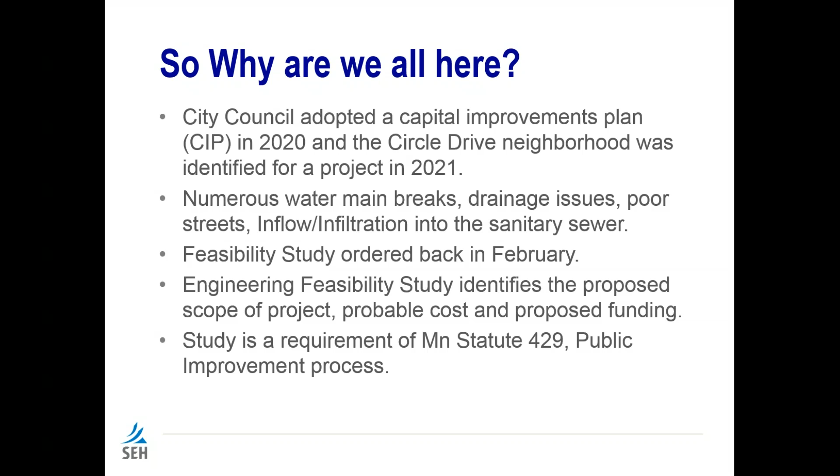So back in February of this year, the City Council ordered the preparation of a feasibility study. An engineering feasibility study identifies the proposed scope of the project, the probable cost, and the proposed funding for the project. This feasibility study is actually required by law under state statute 429, which is what we refer to as the public improvement process. Real quick, what is that?

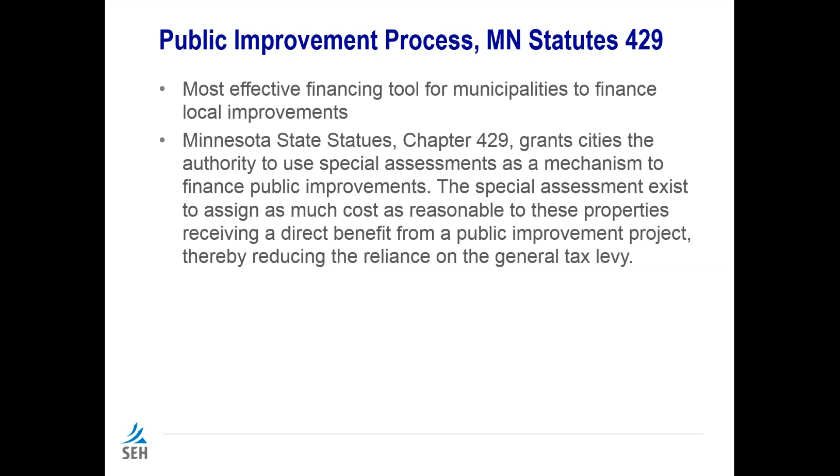Minnesota Statutes 429, as I note here in the slide, is really the most effective funding tool for municipalities and local government. It gives local government the authority to use special assessments as a funding tool to help finance a portion of public improvement projects. Special assessments are basically set up to assign as much cost as reasonable to those properties that receive benefit from the projects, helping to reduce the burden on the overall community.

So what is the scope of this project? Most of you are from what we refer to as the Circle Drive neighborhood - North Circle Drive, East Circle Drive, West Circle Drive, Inner Drive, and Hillcrest. In addition, we are looking at Hickory from West Circle up to at least 5th Street, if not all the way down to Deer Trail, as well as Rogers Drive up to the golf course.

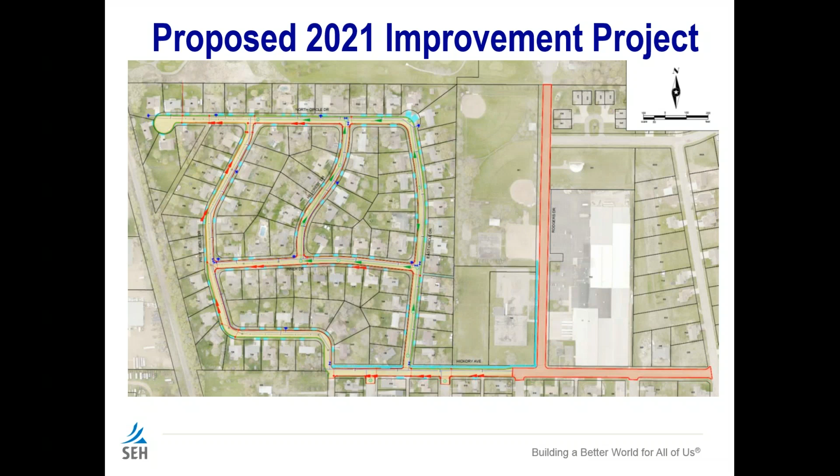Now you'll see the different colors there. The areas in yellow, with a lot more drawing, are the sections of road proposed for full reconstruction - that means everything: utilities, streets, etc. The areas shown in pink on Hickory and Rogers are being looked at as only a mill and overlay, since those sections of street are in much better condition than the rest of the areas in yellow, and the utilities don't have the same issues in those sections either.

So what's proposed in the improvements, just to recap, water main improvements include complete replacement of all the water main in the reconstruction areas. That includes water services between the mains out in the road and the property line up in the boulevard, so replacement of the service laterals that go to your home.

For sanitary sewer, about 2/3 of the sanitary sewer in the Circle Drive neighborhood is old clay tile, and that all has to be replaced. The newer portion of the development, the western portion, is actually PVC and will not need to be replaced. So the clay sewers will be replaced, and the services out to the property lines will be replaced.

Pretty much extensively, all the storm sewer will be replaced in the reconstruction areas. With the new reconstruction projects, we also include installation of sump pump or sump drain boxes, basically a place where the sump pump water can be sent to and drained into the storm system.

Obviously, street improvements, total reconstruction of the streets, with new curb and gutter, driveway aprons, and there is a little bit of sidewalk proposed in a few areas to connect to the North Side Park.

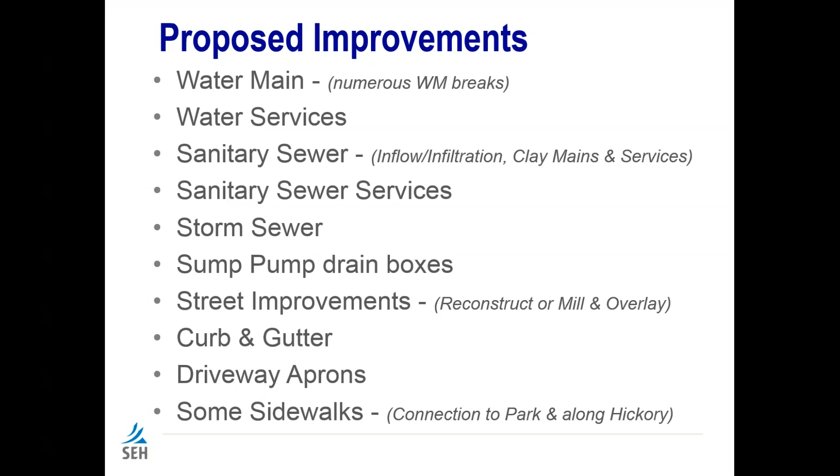I know this is probably real small on a lot of screens, but just to recap for the Circle Drive area, all the lines in red are what we're anticipating as all the new storm sewer.

For those that maybe live over on West Circle Drive and the cul-de-sac, you may realize that there's storm sewer that actually dumps off of Inner Drive and goes into the back between two homes, and then it drains along the railroad. It's not something that's easily sustainable, and it's created problems over the years. It all ultimately ends in the same place. The reason they probably did it way back when was it was the shortcut.

We're proposing to replace that, redirect that storm sewer, and bring it down to North Circle Drive and into new storm sewer, sending it in the same direction.

With that said, our study included a stormwater study and a model of the whole drainage system and how it works with the golf course, the golf course facility, and the wetlands and basins in the golf course. We'll be in communication with the golf course regarding potential pond expansions and things like that. So all of this is intertwined, and the whole system will function better if we look at it all as one piece. So again, in replacement of the storm sewer, it'll likely include some pond construction or pond expansion up in the golf course.

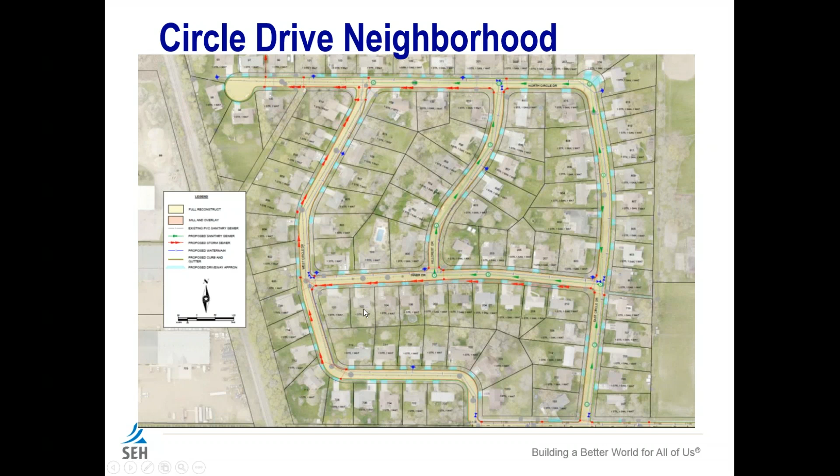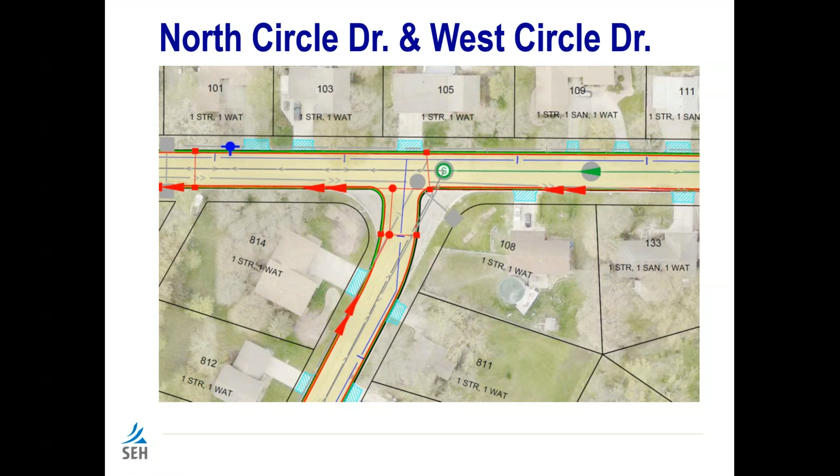A couple of things I want to highlight too in the Circle Drive neighborhood. This intersection of West Circle Drive and North Circle Drive is a big, massive sea of blacktop. We never would build something like that today. It'll be reduced down to a normal geometric intersection that'll eliminate a lot of blacktop. Probably you get a lot of fast cars turning because they can. So that will be modified, and those areas will be put back to turf.

The corner of North Circle Drive and East Circle Drive has kind of a bulge bump out, kind of a half cul-de-sac. We would propose to revise that as well, because it becomes a snow plowing challenge and adds more maintenance to city staff.

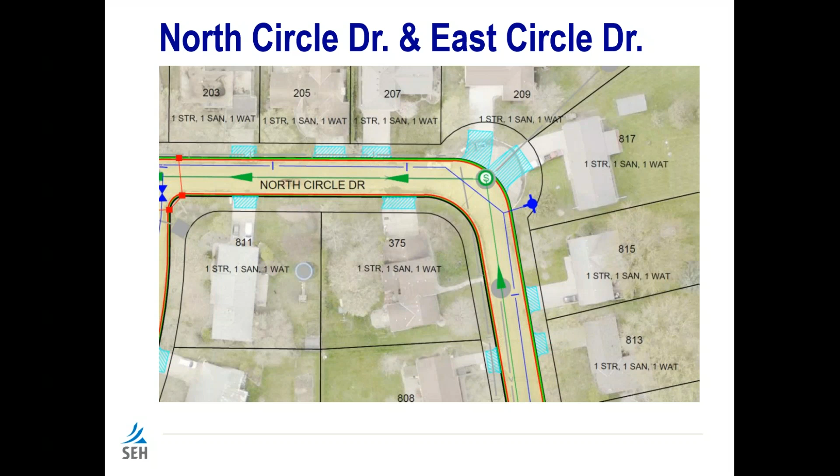Last item, and I don't have really a detail of what's proposed. I see my screen is... there we go. I'm trying to see what you're seeing on the screen, and I think what you're seeing is a slide off. Oh, that's great. If any of this sounded a little odd, it's why it sounded like I was ahead of myself. It seems like what you're seeing is a screen difference from what I am. Okay, let me see what's happening here. My apologies.

We don't have the exact detail on how it's going to look, and this probably doesn't affect most folks here, but there's a lot of unnecessary traffic going down the gravel road of First Street. So we're probably going to do something to make that more like a narrow drive entrance, less of a convenience for traffic to go up and down that gravel road. It's not meant to handle traffic due to its width. It's an alley, not meant to serve a lot of folks. So that'll be part of the design as well.

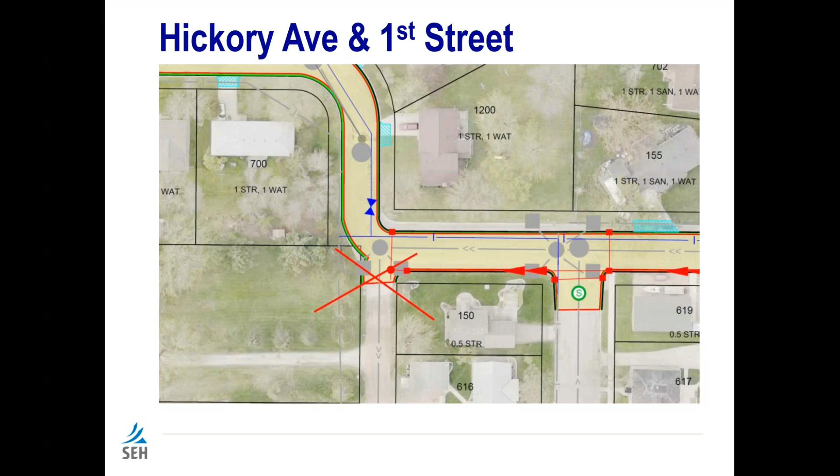Okay, next slide is Hickory Avenue. As you can see, the west half of Hickory Avenue is the proposed reconstruction. The east part and Rogers is what we're showing as a mill and overlay. The reconstruction here on Hickory Avenue will be the same as what's proposed in the Circle Drive area. Not to get into a lot of details, but again, it's a full reconstruction, full subcut, full preparation of a road bed, way better than what's there today.

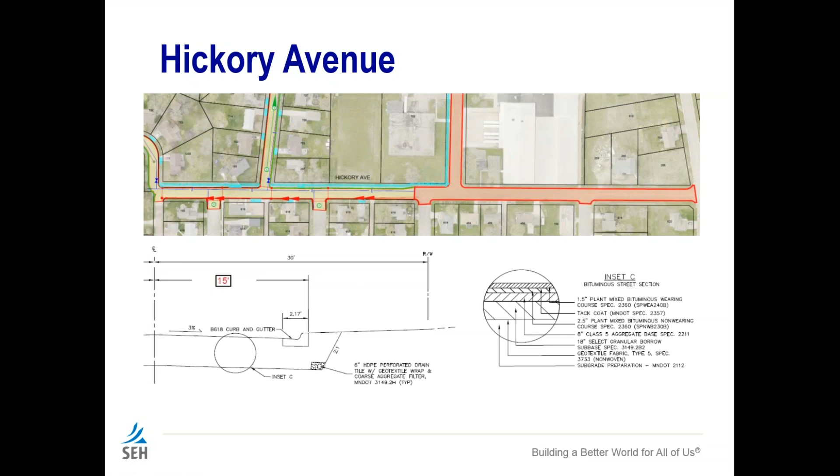If you can read this, basically we excavate down and place geotextile fabric. There's 18 inches of sand that works with a sub-drain to help get rid of sub moisture. It's also where the sump pump lines can go. On top of the 18 inches of sand is 8 inches of aggregate base and 4 inches of new bituminous. So again, a superior section, one that is more sustainable, can last longer, and is easier to maintain long into the future.

Rogers Drive, which will pop up here in a sec, is again mill and overlay. I'm showing here the section on that. What that usually includes is an edge mill near the curb line, which provides a little space for the new blacktop to be placed, and then basically a 2-inch layer of new blacktop is laid over the top. Again, mill and overlay, pretty basic - helps strengthen the road, preserve what's there, and extend the life of that road.

Chris, I've got a question for you here. Sure. I believe Ed or Gene asked, when you say east half and west half of Hickory, where is the midpoint - where does east start and west begin? The intersection with 2nd Street... so just west of 2nd Street. I'm sorry, I got my streets mixed up. So just west of 4th Street would begin the full reconstruction from there to the west.

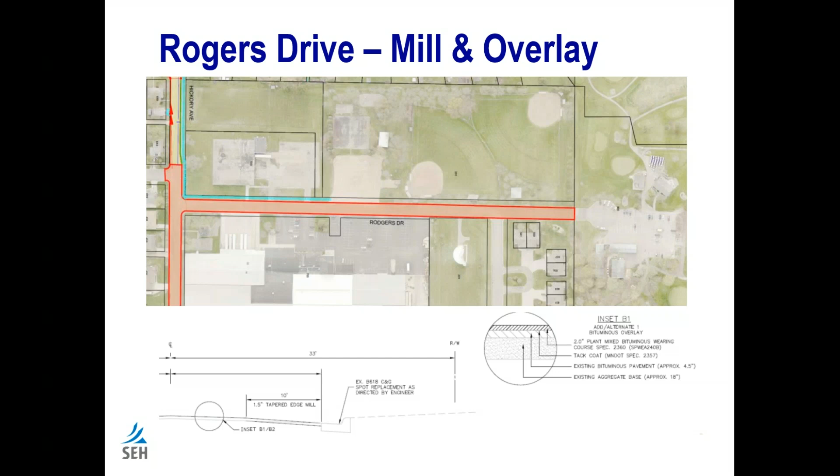Next, as soon as the slide pops up, is the total estimated cost of this project, and this is still preliminary. We're in the process of still evaluating some of our cost estimates, and there are some things here that are probably still not included in the cost. An example being, if we do some ponding, that cost is not in here. And as I'll show you later, the only thing it'll affect is funding from the stormwater fund, not directly if assessments are made. So as you can see in the numbers here, I'll read them off roughly if you can't read them on your screen.

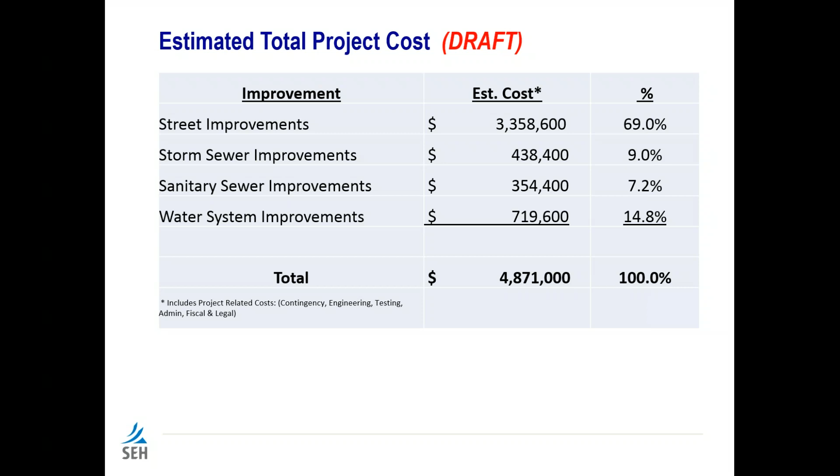Street improvements are estimated a little over 3.3 million, or 69%. Storm sewer improvements are estimated at about 438,000, or 9% of the cost of the project. Sanitary sewer improvements are about 354,000, or about 7% of the project. And water system improvements are about 719,000, or about 14.8% of the project. Total estimated cost of the project is about 4.8, almost 4.9 million. And again, there may be some items not included here as we finalize what we're looking at for stormwater ponding and things like that.

So how are local projects funded? Projects like this - general levy, which is citywide property taxes, that's one way. Fees from the sewer utility, the water utility, the stormwater utility - those enterprise funds, the money they collect from monthly charges, has helped fund those improvements. In fact, a good share of that's coming from those funds. Assessments to the benefiting properties.

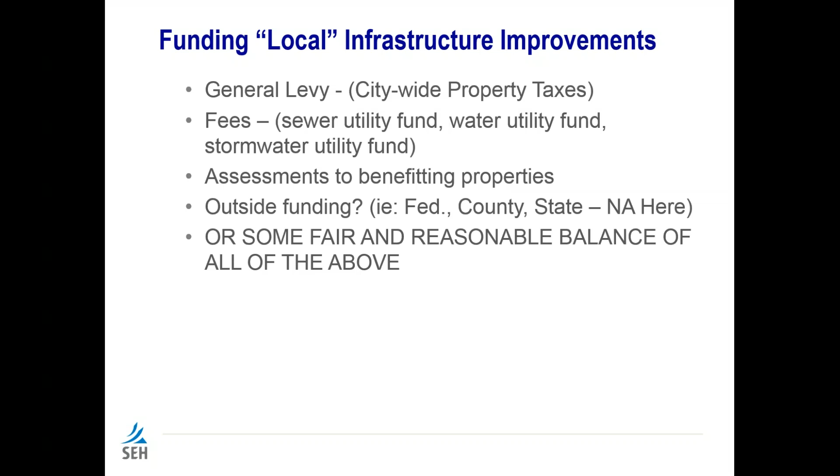In some cases there's outside funding available, but for a project like this, given its location, there really aren't options for outside funding from county, state, or federal sources. So what we aim for is some fair and reasonable balance of all funding sources.

The proposed funding as laid out in the feasibility study: sanitary sewer utility fund, about $297,000, or 6% of project cost. Water utility fund, about $592,000, or about 12%. Stormwater utility fund, $438,000, or about 9%. Assessments for street, water service, and sanitary sewer service, almost $980,000, or about 20%. The balance, from general debt service through the general fund, is just under $2.6 million, or almost 53% of the cost of the project.

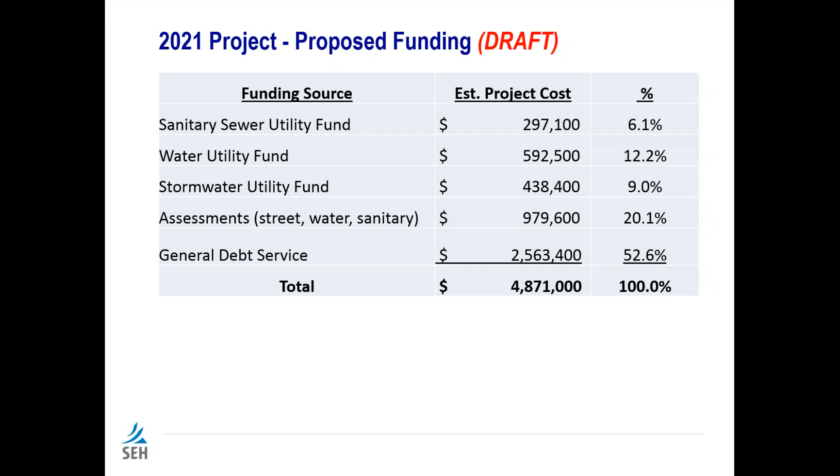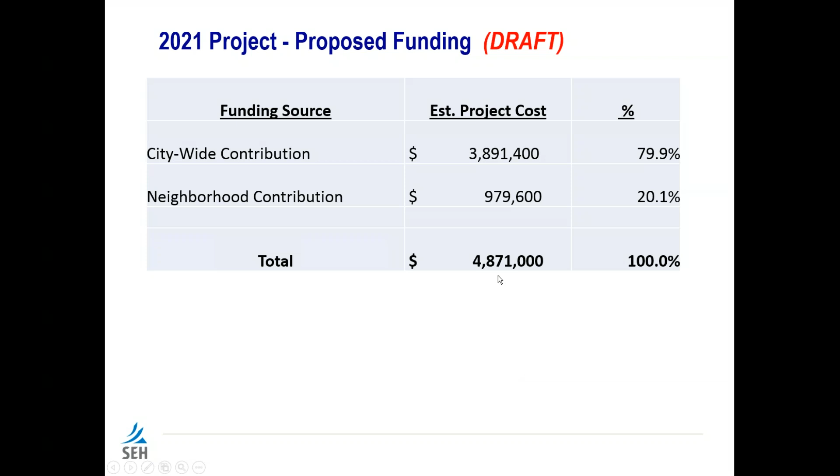That balance would be through the general debt service. I always like to do a comparison slide: citywide contribution includes all those funding sources plus general debt service, about $3.9 million, or almost 80% of the cost of the project. The neighborhood contribution, which is the assessments, is about $980,000, or about 20% of the cost, bringing us to just under $4.9 million total.

Let's talk a little about assessment policy and methodology. The City Council and Public Works Advisory Board developed an assessment policy back in 2013-2014, prior to the Fifth Street project. The assessment policy was adopted by ordinance, written so that assessments on future projects would be consistent, uniform, fair, and equitable from project to project.

The baseline is that all single-family residential properties are treated the same, because everybody is part of a street system. The residential unit is basically our baseline for how all assessments are determined. I'll get into that in a bit so you understand what that means.

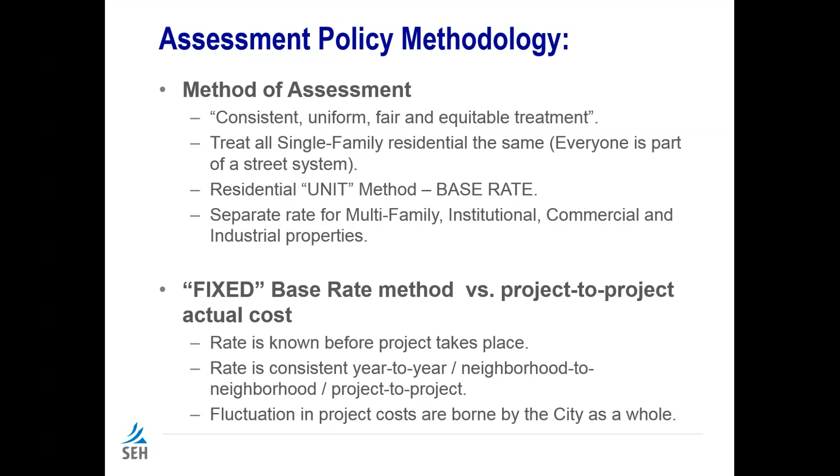For corner properties, if there's an improvement on one side, they get a half unit on that side, and a half unit on the other side if improved there too. There may be cases where only one street is done this year and the other in a future year, so that corner property may pay a half unit on this project and a half unit on another. Ultimately, once both corners are done, it totals one unit. That's how residentials are determined.

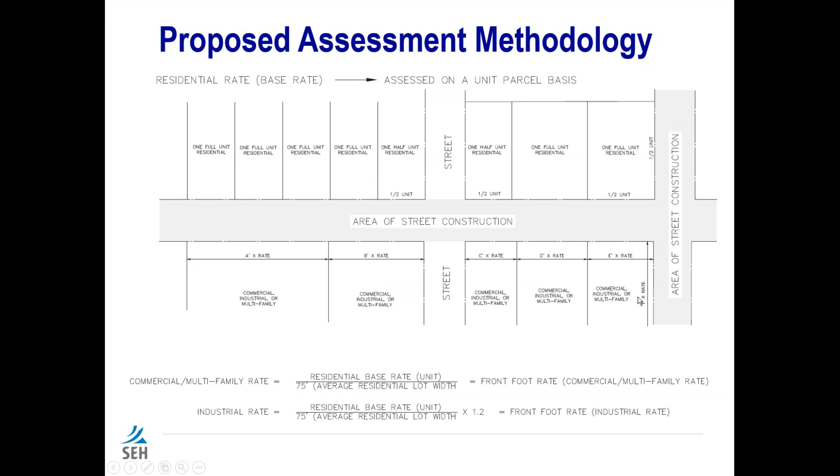Commercial properties are assessed similarly, but since they may be larger, their total front footage is measured and a front footage rate equivalent to the residential rate is applied. To determine that rate, we take the residential rate and divide by 75, an average residential property width, to get a front footage rate. This is applied across commercial, industrial, and multifamily parcels, assessed accordingly since they're typically larger.

When I talked about fixed rate, unit rates, this is how the rates are. For the full reconstruction street assessment proposed for 2021, it's $7,027.80 per unit. So your single family residential property for a street full reconstruction would pay $7,027.80. Those on the corner would pay half if only one side was being done.

For the mill and overlay, and we don't have too many residentials, but that assessment would be $1,621.80 per residential unit, single-family residential unit. And again, those are the baseline for the multifamily and industrial, etc. that are calculated.

The multifamily commercial properties are assessed at $25.95 per front foot. And then we have a townhome property up by the golf course, and those end up getting divided up by each unit, and in the end they only pay $497 for their mill and overlay portion of the project.

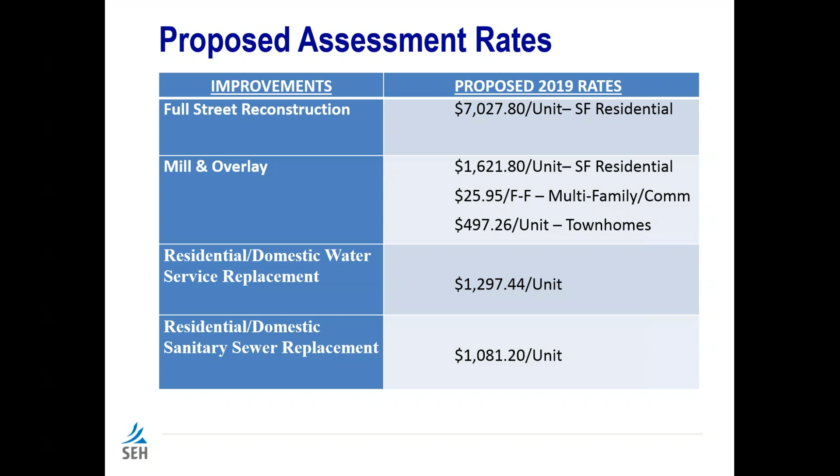For those, there's some properties that will not have sewer service assessments because the sewer mains and services are PVC, so it'll only be water service and street. That amount would be $8,325 per unit.

Talk a little bit of... it's jumped screens on me. Oh, there we go again. My apologies, there's a delay here. So it'll pop up here in a sec. So to talk a little bit about the assessment process, where is that darn slide? So anyway, the assessment process. We're seeing the assessment process now, Chris. Pardon? Okay, we're seeing that slide now. Okay, yeah, I must have a delay on there.

There we go. Okay, so basically, the way the assessment process works, if you've never been through it, again, I should point out that the assessments and assessment hearing will not take place for about another year. It'll actually be probably about February of next year, so consideration by the City Council in February of 2021.

The way the assessment policy is written, a property that's assessed has until October 31st of 2021 to pay the assessment if they would like to pay it up front, or they can be levied to the county and payable over with the property taxes over a 15-year period, where the first payment would be due in 2022.

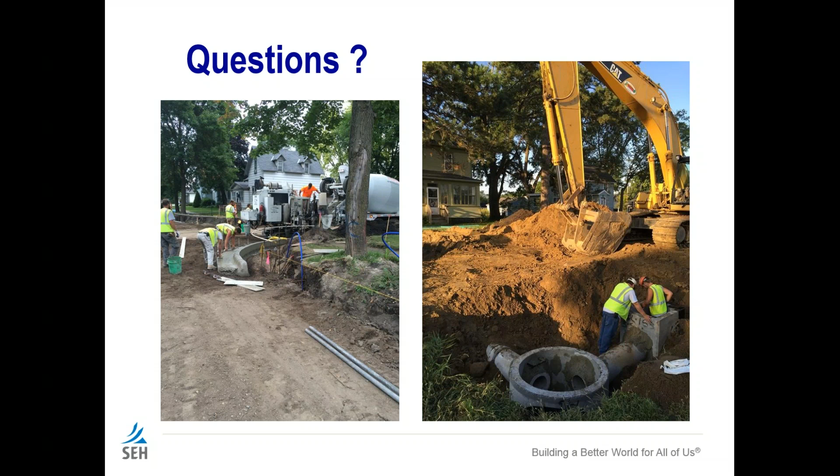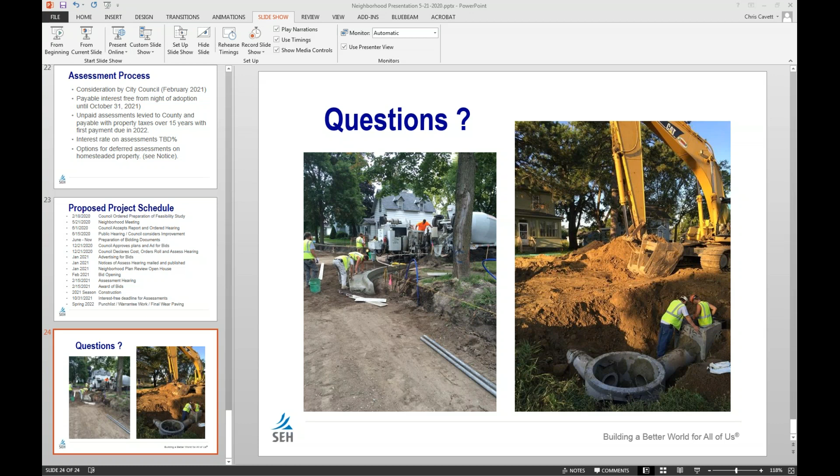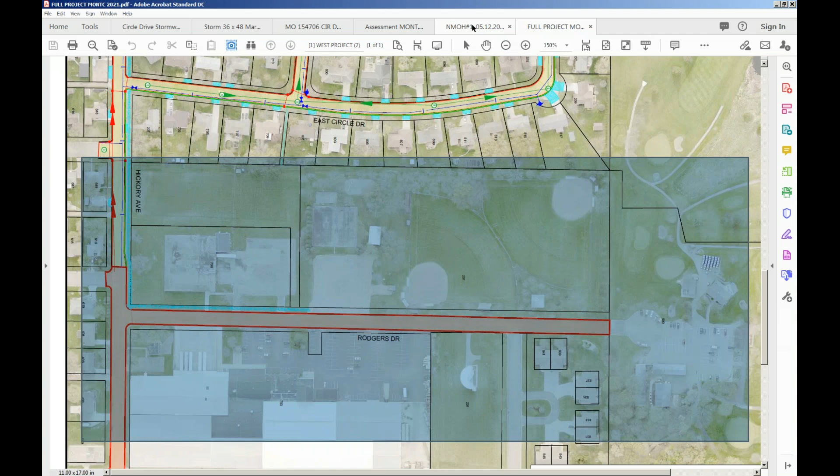One question I know came up, and I'm going to go to a different slide, was about access. I'm sure there's questions about how we're going to get in and out of the neighborhood. Sorry, I've got all these darn slides up here. Obviously those are a lot of fine details we haven't necessarily gotten into specifics on—those are things that get written into the contract—but just generally speaking...

Take the Circle Drive neighborhood—construction will definitely occur down in the cul-de-sac. Construction always has to occur at the downstream end of the sanitary sewer and the downstream end of the storm sewer, so it'll start down at that end. The contractor still needs to have access and maintain reasonable access to the neighborhood.

I would imagine they would probably do the cul-de-sac and then start up West Circle Drive. When that happens, people who live in that area would be able to access maybe from Inner Drive, from Hillcrest, from North Circle up to a point. Depending on what type of work is going on, folks may need to walk a short distance to their home during certain times of construction. Certainly during the active time when the trenches are open, nobody's going to get to their house.

If there are people with special needs, we'll obviously be asking those questions, and arrangements will be made. As different parts of the project become buttoned up, they will become the access points for other areas that start to go under construction. So generally speaking, the contractor still has to be able to get in and out with their equipment as well.

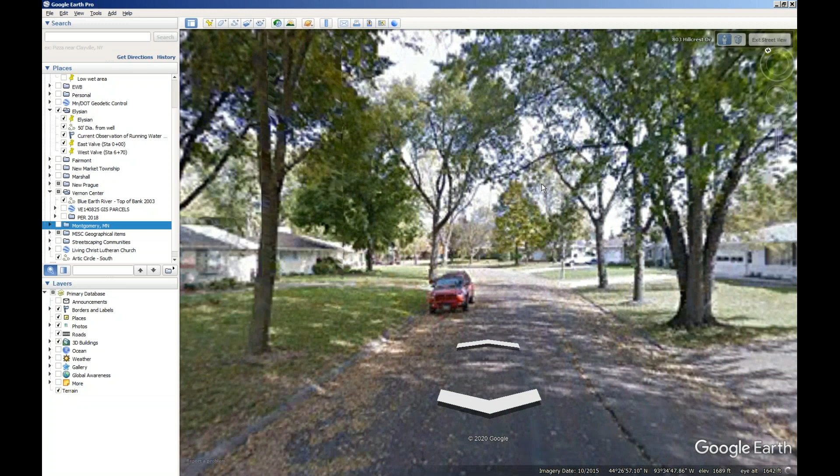The answer is yes, and we haven't gone through and evaluated specifically—I'm not picking on Inner Drive here, but I just brought up the street view. If we have a lot of trees real close to the curb, there's probably a good chance they're going to be taken out, number one because of exactly that reason, the root damage. Also keep in mind, we're building this road for the next half a century plus.

And those roots are going to wreak havoc on a new street, so we will go through and evaluate it. I know this is an older neighborhood with a lot of older trees, and especially if they're ash trees close to the curb, we'd probably be looking at taking those. I know Public Works would prefer not to have any trees at all in the public right of way, so basically about 15 feet behind the curb is what we'd be looking at and evaluating whether it should be removed. I'm not a big fan of taking out trees, so we don't just blatantly go through and plow everything down—we take a professional look at it and determine what makes sense for the long term of the street, utilities, and other things in the neighborhood.

The next question to Chris, unless there's a follow-up: will Hickory be done following the work in the Circle Drive area? I'm assuming as far as phasing.

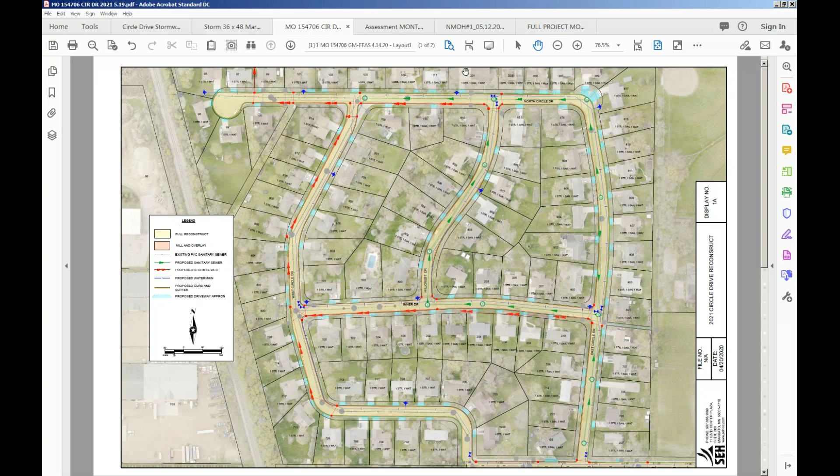Yeah, that'll be something we'll evaluate as well. Obviously, Hickory is going to be key to access to the neighborhood, so the contractor would have to be strategic on how they deal with it. I could see them maybe, if they're working on West Circle Drive, building it out to 2nd Street, so at least they have 2nd Street as a second access. Once they need to start on the rest of it, then they've got access now, whether it comes in from the west or the east. Again, we need to be able to flip-flop and strategically use 2nd or 3rd to get into the neighborhood.

Next question is, when it comes to funding, is there any consideration of actual water usage? Example, one family's average use is 5,000 gallons a month, another family uses 2,000 gallons a month.

No. The assessment for the water main improvements is funded from the water utility fund itself. The only portion that's assessed is the service lateral from the main to the house, and that's not dependent on usage. Everybody is a user and everybody contributes to that fund, but the water service is considered actually owned by the property owner. So the bigger user, when it comes to water utility payments, that obviously fluctuates by the user themselves, but the actual pipe that goes in the ground is indiscriminate. It costs the same no matter which house or which property it goes to.

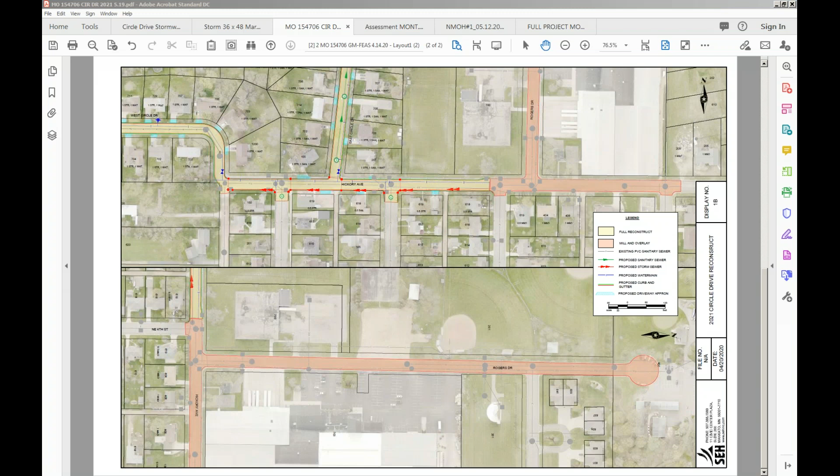Sidewalk plan. I should point out a couple things here. Let me see if I can bring up a different slide.

Okay, this is an overall picture of the neighborhood. So the sidewalk we are looking at including with the project -- I didn't mention this before, but Hickory Avenue is actually fairly wide, wider than we'd build a street like that today. We're proposing to narrow it a little bit from the north side, bringing the north side a little closer to the middle of the road. That provides a little more room for placing a sidewalk along the north side of Hickory up to Rogers, and then from Rogers up to...

At this point we've decided to terminate it basically at the parking lot for the city park. There are some intended improvements for the park, and we wanted to make sure we didn't go beyond that point, because that'll also include some trail and sidewalk work at that time.

Basically to provide access -- mostly what the sidewalk does is provide access more than anything for some of the folks in the Circle Drive neighborhood, but also properties to the south, down on 2nd, 3rd, and 4th.

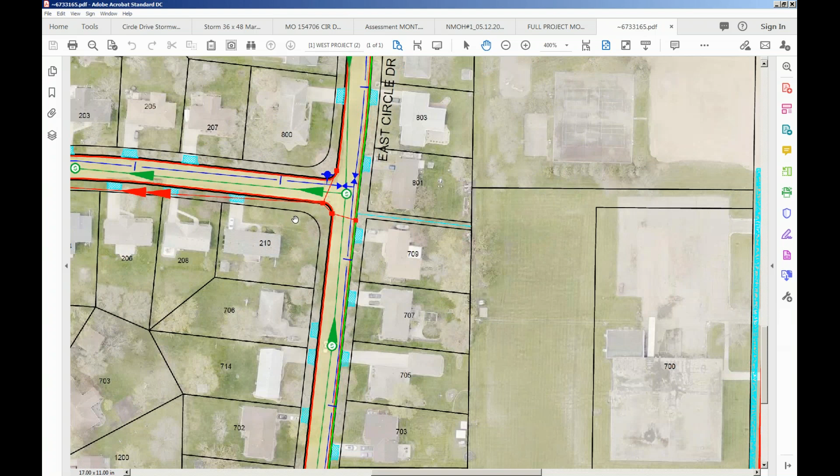There was a question about the blacktop. So the first layer, typically what we do in a full reconstruction when there's utility improvements taking place, is the roadway gets completed and the first layer of blacktop goes down -- the first 2.5 inches. Then usually we come back the following year and put the last finish coat down.

The reason we do that is just in case there may be some minor settlement that occurs over the winter. If it does occur, it usually happens in that first season. Maybe there's some warranty or punch work that has to be done, something corrective. It's easier to open up a section in the base course, patch it, and then when you're all done, do that final lift of a wear course, so we get a better product in the end.

What are the plans to handle the field tile water that comes from Northside Park over into East Circle Drive?

I guess we'll need more information, because as I understand it, or as I observed it in the field, there is a berm along the back property line, and then there's a tile on the park side of that berm that drains to a storm sewer at the end of this easement, and that storm pipe connects into the storm sewer on East Circle Drive. So if there is drainage coming off the park onto East Circle Drive, we need to know more information on that.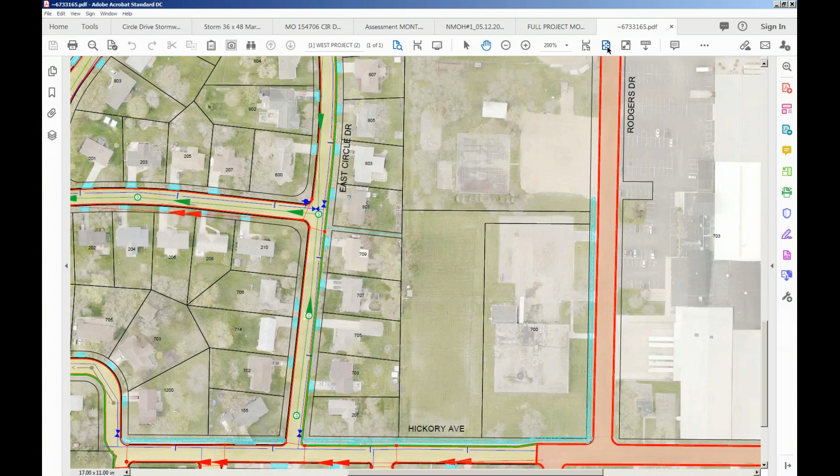Yeah, I'm here. The reason we didn't do trees in 2017 is that the neighborhood where we were doing the trees really didn't want them. They came out and said no, we're good without trees. After all the trees were gone, several neighbors came back and said, well, we'd like to have trees back. So that's when we selected a specific range of trees that residents could pick, and then we acquired the trees, and they were responsible for planting and maintaining them.

I think what I would rather do is see how many trees come down and then work with the residents on a tree replacement plan. We know we don't want to put trees too close to the right of way, and we don't want to put them too close to the sanitary sewer lines because of the root issue. But I also know that a neighborhood without trees isn't very attractive. So I think we have to plan on putting some trees back, and it's just a matter of how we do that.

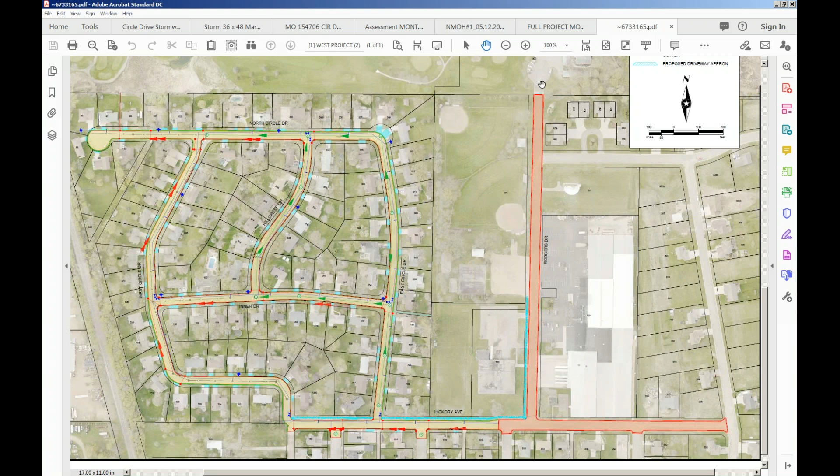Yes, so most of the streets are going to be about the same width, with the exception of, I think there's a portion of—and Doug or Dominic, you can probably chime in, your memory's better than mine—but I think a portion of West Circle and the western part of North Circle and the western part of Inner Drive are wider. They're too wide, that's correct. They're wider than they need to be for a neighborhood like this. I think streets like East Circle are all at about 30 feet, and that's really the width we're looking to stick with in this neighborhood, so that everything's consistent.

A 30-foot wide street in a neighborhood like this is a nice standard width. It works well, doesn't have to be too wide, keeps traffic a little calmer, things like that. It still accommodates parking—if two cars are parked on the same side, people are going to have to slow down, and they might pass at the same time, or they might take turns. Just depends on the driver.

Question: will the street on East Circle Drive be sloped enough to allow the water to drain better? Right now there are spots, so yes. The quick answer is yes.

There's a lot of goofy things out there. Some of it may be original, some may be years of evolution or whatever's happened. But we start with a clean slate and do a new design. Roadway design is basically, what we do is design that road to best fit all the driveways. We look at every driveway, and we don't customize for an individual driveway, but we do the best fit so that roadway will fit all those driveways on that street. We set the road at a minimum grade, or to meet minimum grade standards, so the road can drain. We'll add more catch basins than there are today, put them in better places than there are today, and things will work better.